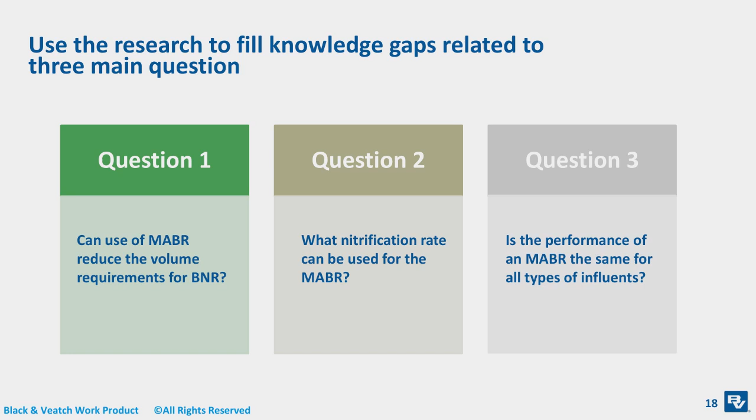So our first question is all about how much SRT. We use this as a parameter to classify our treatment systems, and we have some very good understanding of how long an SRT we need to achieve nitrification. We did some modeling work. In fact, there's a paper - the first author is one of my good colleagues, Kelly Gordon. We presented it at WEFTEC a few years ago, where we explored in a modeling framework what is the potential value proposition.

So here you're seeing some results from that. If you look at the plot, essentially if I draw a horizontal line at around 0.5 milligram per liter ammonia as my target, if I'm using a conventional MLE process, the green diamonds, I might design for an SRT of maybe 6 days to be safe, or 5.5, for this particular scenario. In contrast, if I use an MABR suspended growth hybrid, the circles, and I want to achieve the same target, this is suggesting I might design for 4.5 days, or if I want to be a little more aggressive, maybe push to 4 days. Hard to say one way or the other, but there is about a day to a day and a half reduction in the SRT required. This is what the modeling data suggest.

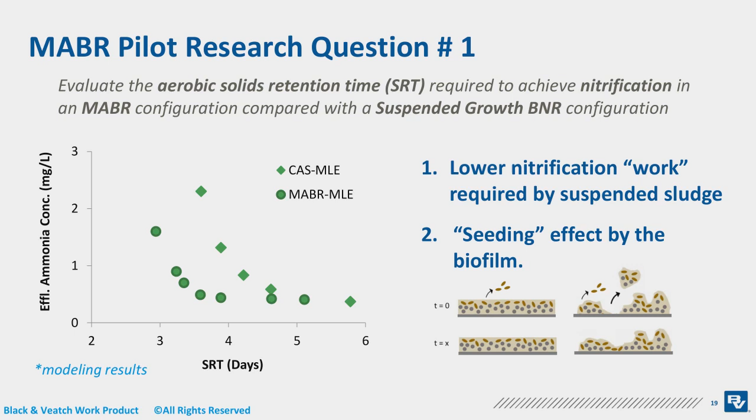I just want to go back for a moment to the previous slide - you'll see here each of these SRTs is much, much lower than what one would conventionally use in a nutrient removal system to achieve these very low ammonia levels. We were targeting an ammonia somewhere in the 1 milligram per liter range. We said let's go all the way to around 3 days suspended SRT.

So I'm going to show a couple of these plots again from top to bottom, increasing SRT. This particular one is for COD removal across the system. Coming into the pilot, let's say around 300, and leaving the MABR at the shortest SRT around 100, and going across into the effluent around that same 100 or so.

We're definitely getting some removal across the MABR itself, but none in the suspended growth part of it. As I increase the SRT, that trend that we're not getting any more COD removal across the suspended growth piece of the pilot remains fairly consistent. But as expected, as you increase the SRT, the effluent COD goes down to around 50 milligrams per liter, and that doesn't seem to change very much. Not a revelatory result, but interesting to see that even at a very low SRT, we can get quite a lot of BOD COD removal.

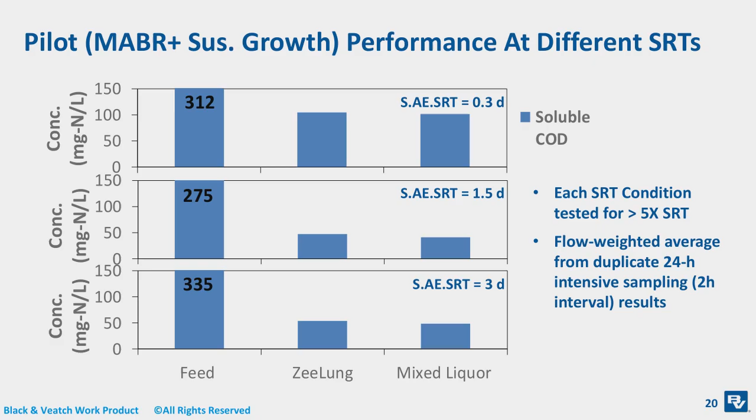Here we're looking at nitrogen species now. The blue are ammonia, red are nitrite, and the green are nitrate concentrations. Again, left to right is going from the feed of the pilot to the effluent of the pilot, and top to bottom in the panels is increasing SRT.

Here I actually want to start at the bottom. So at a 3-day SRT, where the ammonia coming in is largely ammonia, let's say in round numbers it's in the 40-ish milligram per liter range. Leaving the MABR zone, the ammonia is down to around 15, with very little nitrite and very little nitrate at a 3-day SRT. So we've lost nitrogen, gone to nitrogen gas, and then we see that in the suspended growth portion, the fine bubble aerobic portion, we're converting more of the ammonia into nitrate.

As I reduce the SRT, so as I walk up in the panels, I want to draw your attention to what we thought was very interesting. At an SRT of less than half a day, less than the SRT that a typical even BOD removal system is operated at, we are getting total nitrogen removal across the MABR zone to the tune of about 40%. This was quite interesting for us.

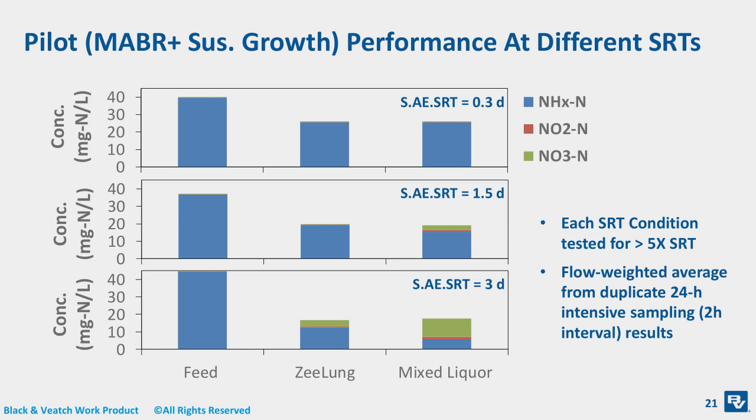And then even at a 3-day SRT, much lower than what one would normally run a suspended growth system to achieve nitrification, we can get excellent nitrification. And with a little supplemental carbon, you can probably drop that nitrate down to something quite low. So a very good result over there. So it does indeed accomplish nitrogen removal.

We explored a little bit the biofilm characteristics as well as the mixed liquor characteristics in terms of which bacteria are present. We used qPCR to assess the total bacterial concentrations, or mass, or gene copies, and compared that with the known nitrifying bacteria concentration.

Shown on the far left is the seed biomass. We had seeded this pilot with mixed liquor, with RAS actually, from a plant that runs very, very conventionally, around an 8 to 10 day aerobic SRT, so it nitrifies very well.

And then here the data are a little jumbled. They're shown chronologically because of the way we operated the pilot. So second from the left are the data from the 0.3 day SRT. Essentially there's very little mixed liquor, it's mostly on the biofilm itself. Then is the 3-day, and then is the 1.5 day.

So this is quite interesting. We do see that at the 1.5 day there seems to be quite the concentration, or percentage, of nitrifiers in the bacterial community comparable to that of the seed, but we see it's a bit lower in the 3-day. There are reasonably large error bounds around these green bars, and I think all this is saying is that the history of the biofilm itself plays a role in modulating the presence or absence of certain bacteria.

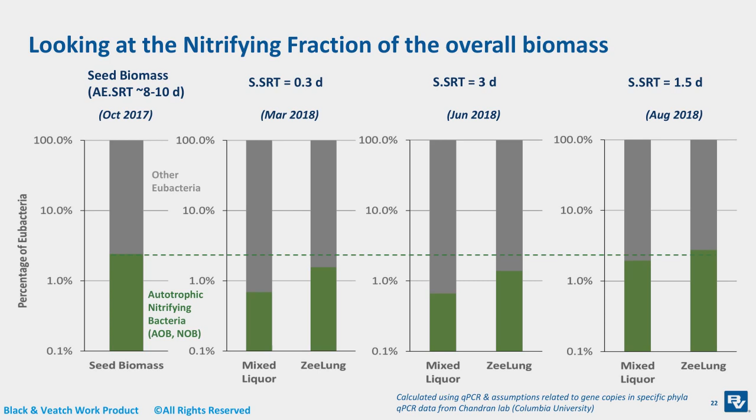So our second question now, moving on, all about the rates. Of course, this is a membrane system, so the metric we use for rates and sizing is the membrane specific rate. That is, how many grams of nitrogen can I remove or oxidize per day per square meter of MABR membrane surface area? Here we had hypothesized that it should be somewhat...

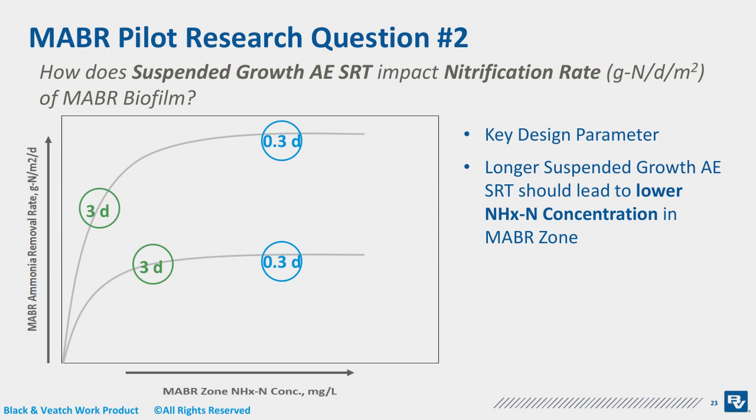...Monod, whereas I have more and more ammonia in my bulk, I should be able to drive to higher rates, and this will be a little bit modulated by the DO and a few other conditions. So this is what we had expected.

What we saw surprised us a little bit. So you're seeing here just dots of the rates. The rates are typically in the range of 1 to about 5 grams of nitrogen removed per square meter of membrane surface area per day.

The green dots are the longest SRT, the blue dots are the shortest SRT, and the orange are the ones in the middle. There certainly does seem to be some grouping based on the SRT itself. Again, some of that might be the history of the film. We'll talk about that in a moment.

What was interesting for us when we look at this plot, especially at the higher ammonia concentrations, is that we had expected rates to plateau out around 3 or 4, shown by our dashed line, that's our conceptual model of the world. In fact, what we saw is that rates were decreasing. At very high ammonia concentration, we saw lower rates than at the mid-range, say 10 to 20, and these are concentrations in the MABR zone.

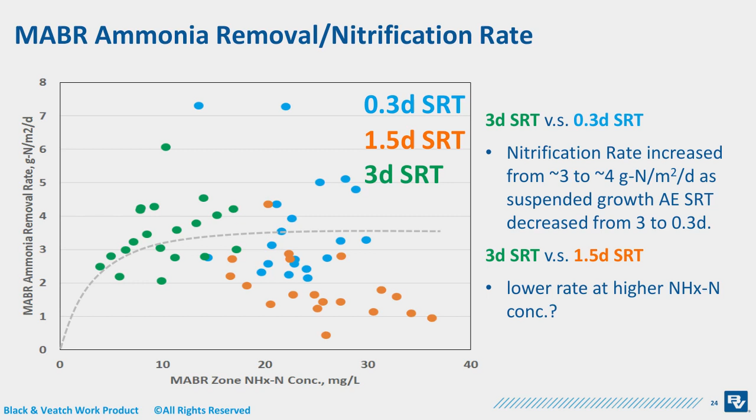We were very curious about this. Why is this happening? What's the mechanism to explain this? So we have a couple of different hypotheses that we explored. One of the things we used to inform that was the oxygen transfer rates, which we were able to measure. So we know how many grams per square meter of membrane surface area per day we're providing, and we know theoretically what it should be.

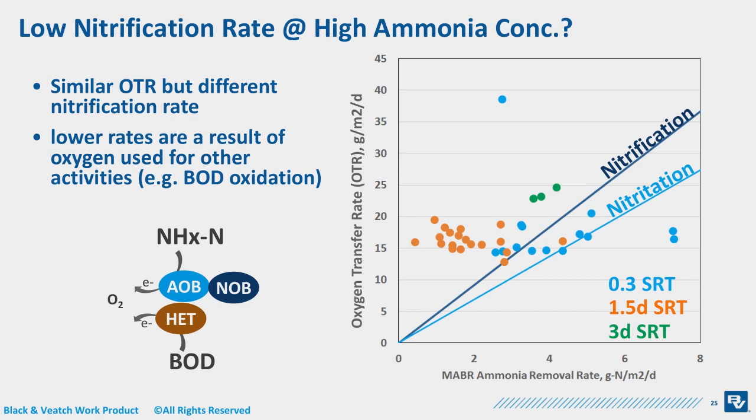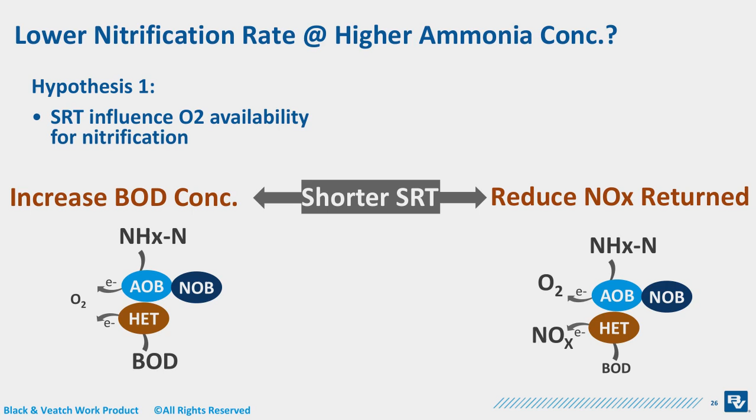So what else is going on? We said, well, it must be for BOD removal itself. The first hypothesis we considered is that if you're running at a shorter SRT, you have less nitrates returned and less of the BOD or COD used for denitrification. So more of it is oxidized aerobically in the biofilm itself. That's why, as you go to the shorter SRT, you're using more of the oxygen to do BOD removal in the biofilm rather than nitrogen removal.

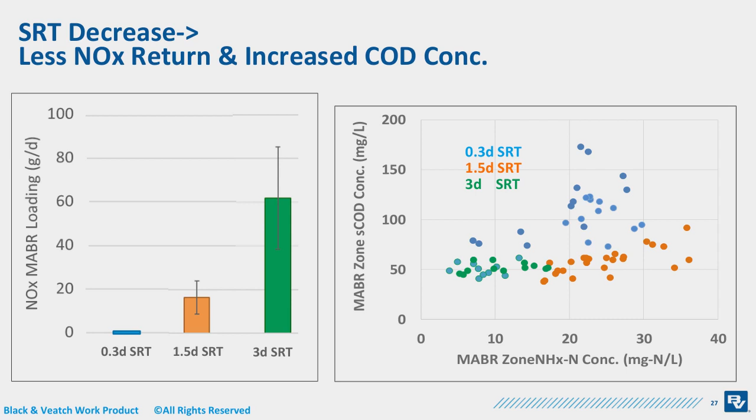So we did indeed explore that, and yeah, there seems to be something useful there that we think has some value for us to explore, because we see there is indeed a bit of a relation there.

The other hypothesis we explored is maybe it's just time. Like any other pilots, we were not doing lab scale assessments, so we're not controlling the feed. It's whatever came into the Hayward plant and whatever came out as PE, that's what we were treating. And you can see that we jumped around - we did the very short SRT first, then the longest, and then the mid-range. So maybe it's just time and the effect of time on the film itself.

That one, it's much harder for us to say yes it is or no it's not. We think it's some combination of both. However, our data do indeed seem to suggest that there is a role that SRT plays, the suspended SRT, in mediating the community within the MABR biofilm that will influence how oxygen is used and what the functionality, the ammonia removal rates, are in the biofilm itself.

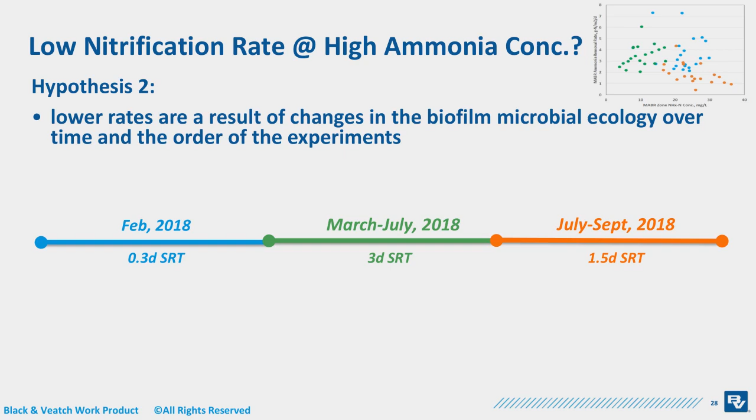The third question that we were keen to understand is where can I use the MABR? As we thought about this, we were thinking about the impact of carbon to nitrogen loading rates. If we think about a treatment facility, in the influent you've got a lot of BOD, COD, as well as a lot of ammonia or organic nitrogen. If I go to a primary effluent, I've removed some of my BOD, COD, the particulate fraction or some of it, but I've not removed any of the ammonia. So I've changed the carbon-to-nitrogen ratio.

Why is this important? Because as we just saw, if SRT modulates it because of the BOD coming in, it means that the biofilm itself is impacted by what function it's being asked to do. And if there's a lot of carbon coming in, that might have implications on the heterotroph prevalence, as well as the thickness of the film itself.

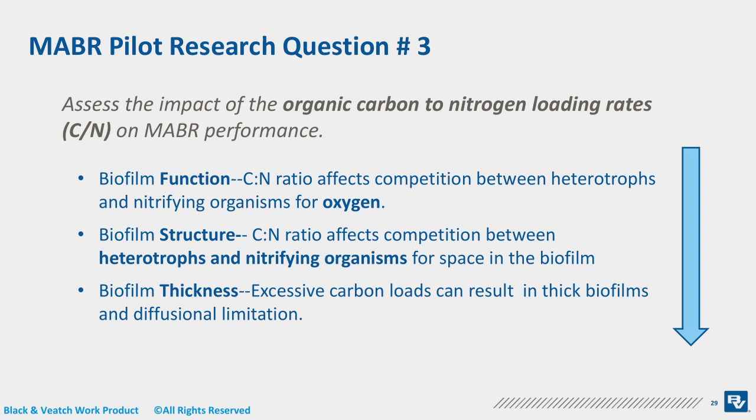So how does it impact operability? What I'm showing here is a comparison of the same MABR operated with primary effluent on the left and trickling filter effluent on the right. Thanks to the plant configuration and staff, we were able to do this, where we ran it with PE for a while and then the trickling filter effluent. When you compare the water quality of these two, ammonias are comparable, but the COD of the trickling filter effluent is extremely low compared to the primary effluent, exactly what you'd expect.

So quite a contrast in the soluble COD to ammonia-N ratio, going from 7 to 2.5. What did we see?

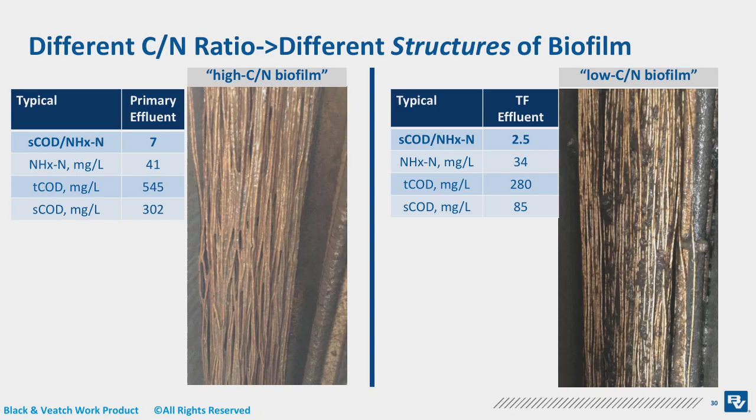So we hypothesized that if we think about this film conceptually with a very high C/N ratio, we'll get a lot of heterotrophs on the outside doing the work of BOD removal, and very little in the way of AOB, NOB, or nitrifier populations.

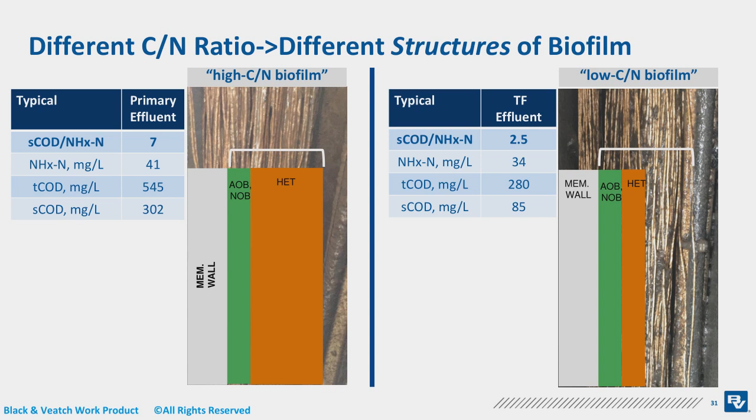In contrast, with a very low amount of carbon, we should see quite a low fraction of heterotrophs in the biofilm itself.

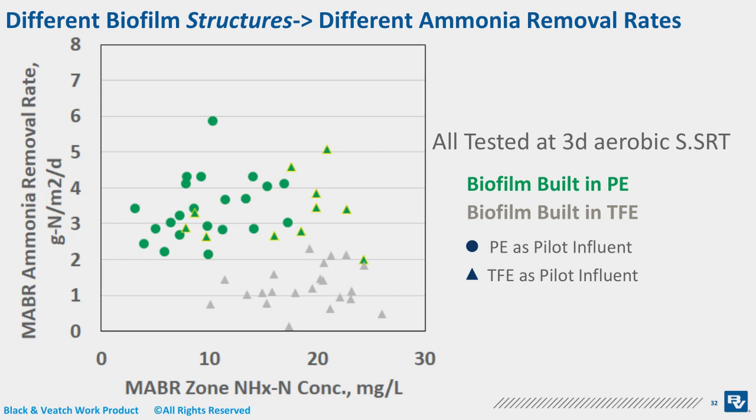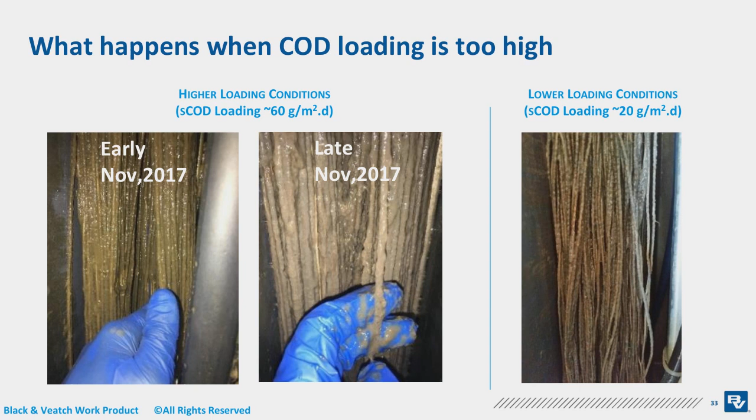You can see, if you look at the left, early November, the film starts okay. It looks dark brown and like a rich biofilm. Then by the time you get about 3 weeks later, it is sticky, congealed, gelatinous, with lots of EPS being secreted. So very high loading rates are not a very good use of the membrane aerated biofilm reactor technology.

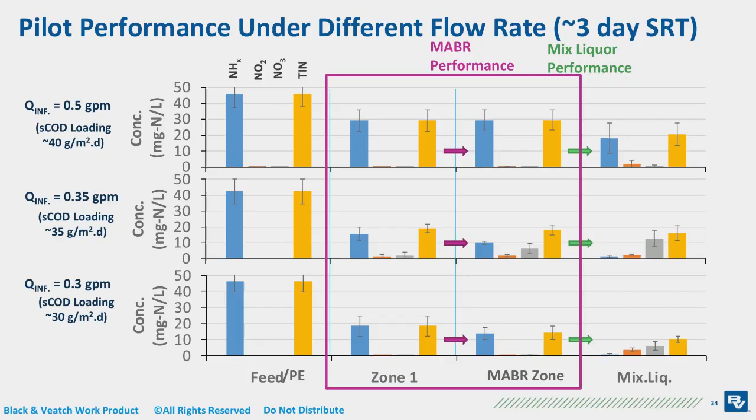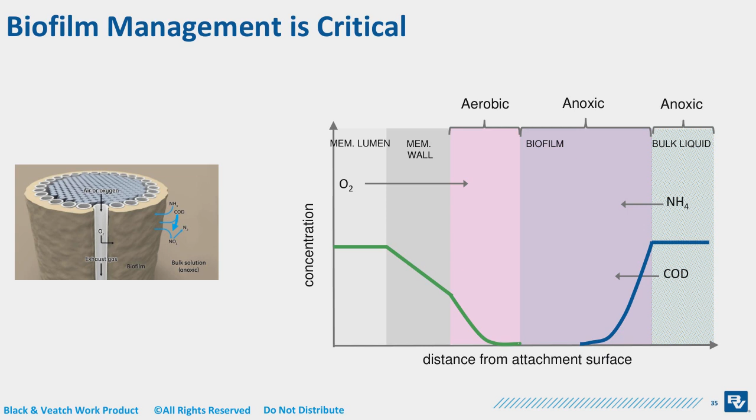So I talked earlier about the unique characteristics of the counter-diffusional film, and this may induce some very interesting behavior. The way we manage this is through a regular air scour. This is an operational issue, and it also results in some costs of doing that too.

We weren't looking at performance, rather the use of oxygen and how that is influenced. You can see that if you scour less frequently, you will drop the rate of oxygen transfer across the MABR film itself, resulting in a less productive breathing film.

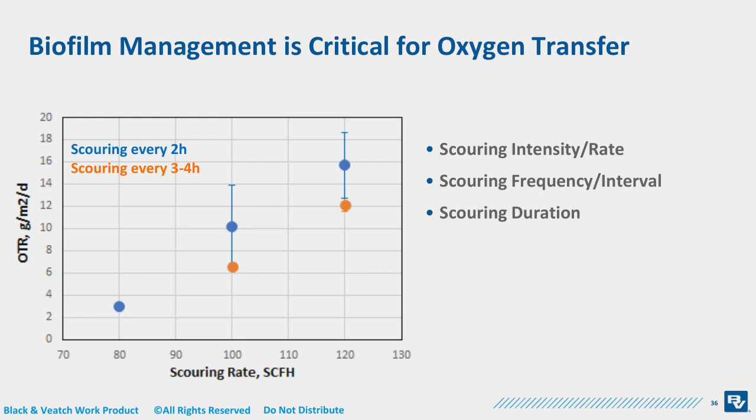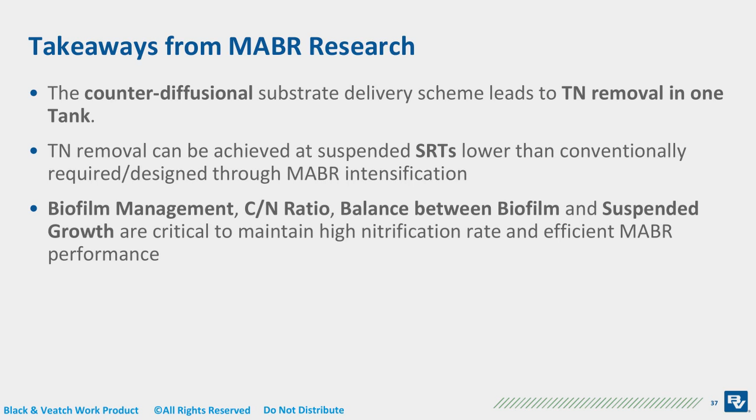And some of that comes into how you would design the system, but also how you would operate it, perhaps seasonally. And I think one of the most interesting things we observed and learned is about how the initial operation, so where you grow what you use to grow the biofilm, influences the performance and productivity of the MABR technology, and as a result, the value.

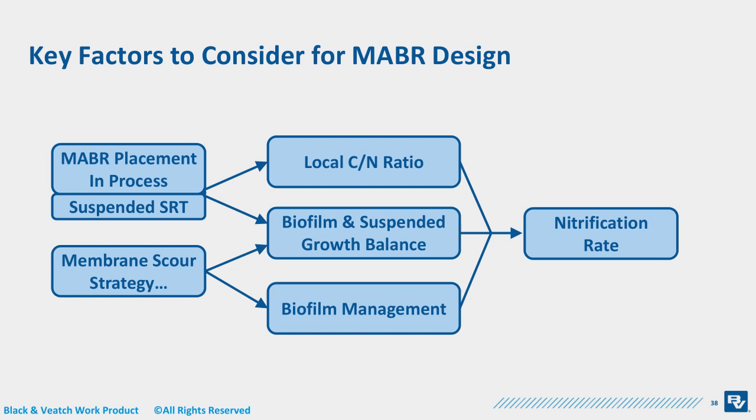We tried to encapsulate what we learned into a simple logigram for us. And so the three key things we see are: where do you put it in the process? What is the suspended SRT that you pick, and how do you design and operate the scour to achieve effective biofilm performance and operation? All of these end up impacting, in the case of nutrient removal, the nitrification rate itself, which is really the measure for us in terms of how well it's doing.

I want to now just think about how we used some of this data from the pilot. So we did a few case studies. I want to briefly share one of those with you, and then jump into Q&A.

I'm excited about that. So consider there's an existing treatment facility. It's quite old now, and looking to add assets and or be modified for the next 20 years. There are two effluent end-use opportunities: one is environmental discharge into the bay, and then the other is for non-potable reuse. It's a fairly large plant, about 20 mgd-ish, and has pretty conventional characteristics in terms of the water quality itself.

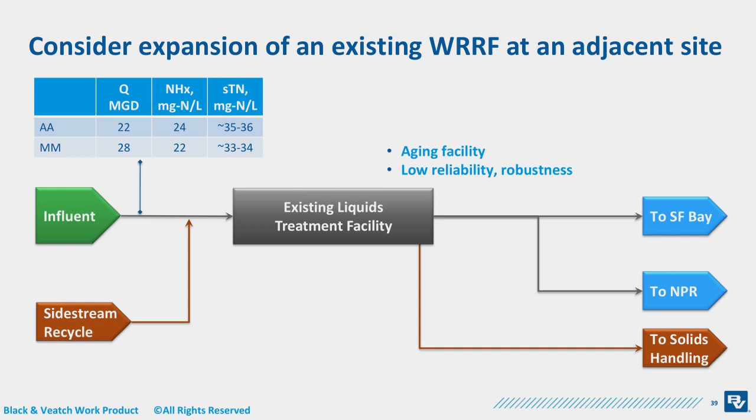The kind of base concept is to build an entirely new facility of some size to accommodate it, and then get rid of the old one. So we were asked the question: if we were doing this as an MABR suspended growth system, how would this influence the size or operation or other aspects of the design itself?

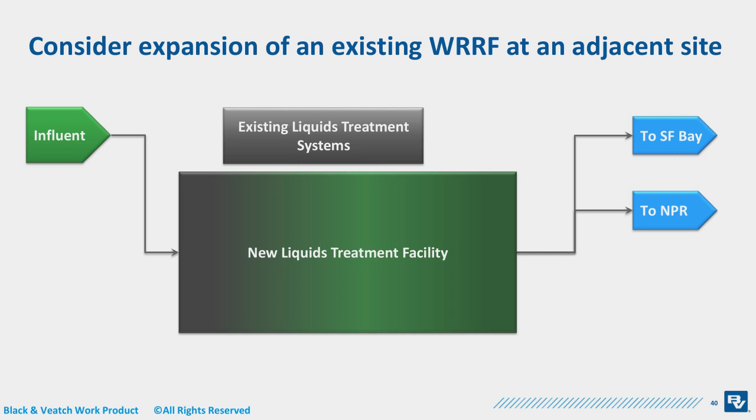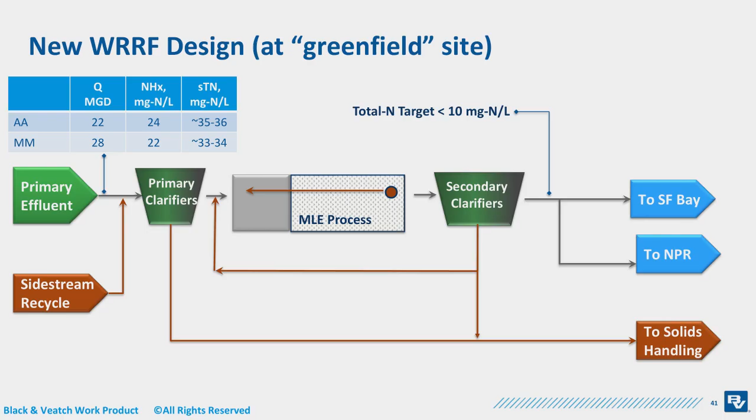So here's the conventional approach. It's an MLE process. That was the base design, targeting about 10 milligrams nitrogen per liter in the effluent. The conventional design was about 11 million gallons of total volume.

In contrast, we found that with an MABR suspended growth design, using the model that we calibrated and developed with our study data, it would be just shy of about 9 million gallons. So you could save 2 million gallons, and in the Bay Area, that's quite a lot of money to have an opportunity to save.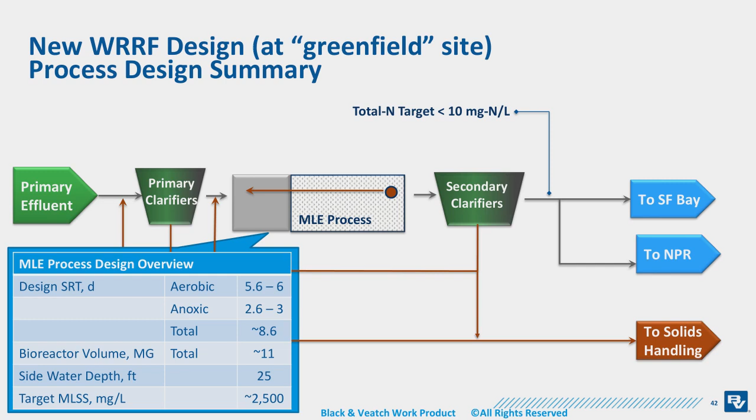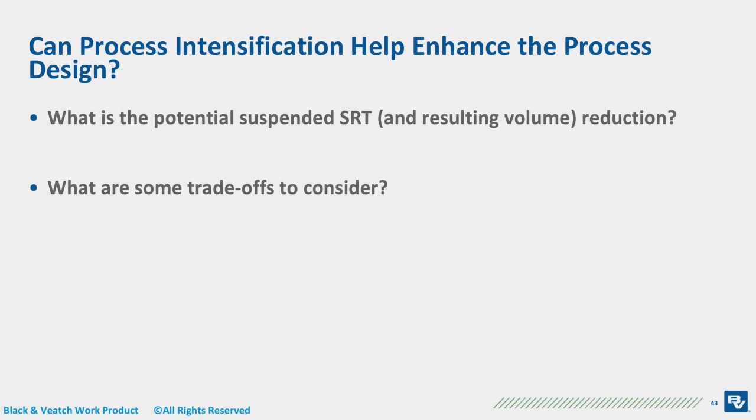So great, there's no question. There's some SRT and volume reduction, but we then asked, okay, what else would one have to be thinking about? So as I said, you're going from about 11 million gallons, this is the conventional MLE design, down to around 8 or 9, in that range.

But the interesting thing is, you're going from a pretty conventional 35% anoxic tank to a 50% anoxic to fit the MABRs into the design itself. So that's a little bit of a change. One has to just get their heads around that, and it makes sense. You're saying, look, the biofilm is doing so much work that I can make the fraction that's the suspended growth aerobic smaller than I would normally anticipate. Again, 2 or 3 million gallon savings in concrete is fairly substantial.

Here are some of the ancillary benefits. Of course, we're all striving for more sustainable nutrient recovery. MABRs offer better oxygen transfer efficiency than our conventional systems. So, not unexpectedly, we see a reduction in the use of air, so the blower gallery, the piping systems, everything can be smaller.

That's a cost saving. The interesting thing to be thinking about is that there's also a reduction in methanol. Supplemental carbon in the conventional approach would have been used to support denitrification, but with the MABR suspended growth strategy, you wouldn't need any methanol at all. So not only is that a cost savings, but methanol is not the most suitable chemical to be used at a plant. We've been using it for many years, but we're transitioning to other organic carbon sources.

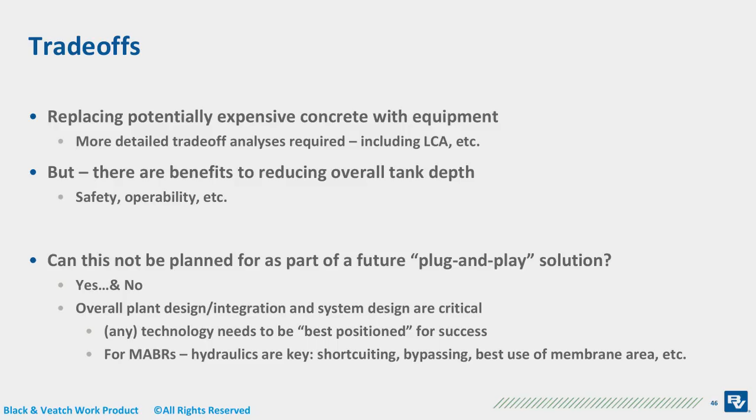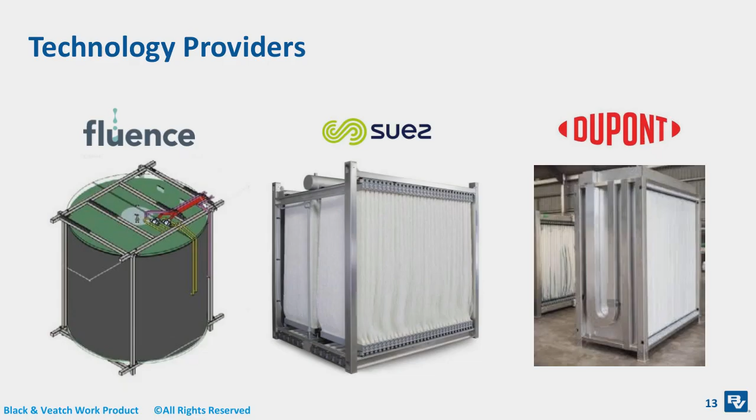What index tells one when the ammonia is used up and ready to be changed? So you can measure it. In the pilot, or even in a full scale system, you would have ammonia probes across the reactor itself. I want to go back a few slides, just go to the beginning and go forward a little bit. Bear with me a moment.

Great questions. Are there others? Okay, I don't see any other questions.

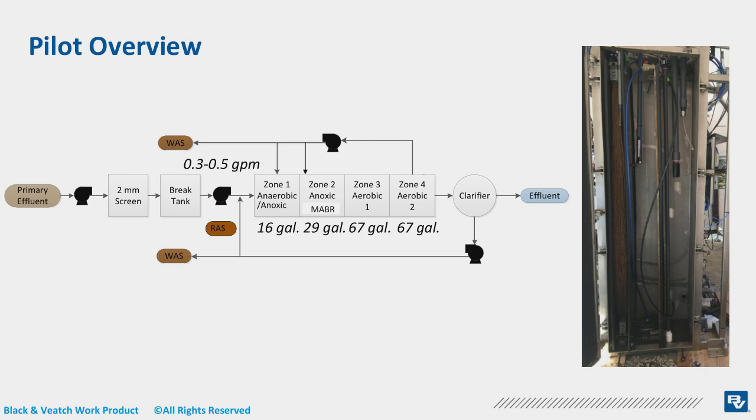And I do see one more question. Great question. We operated at a relatively short HRT of about 5 hours total HRT. So it was quite a short HRT.